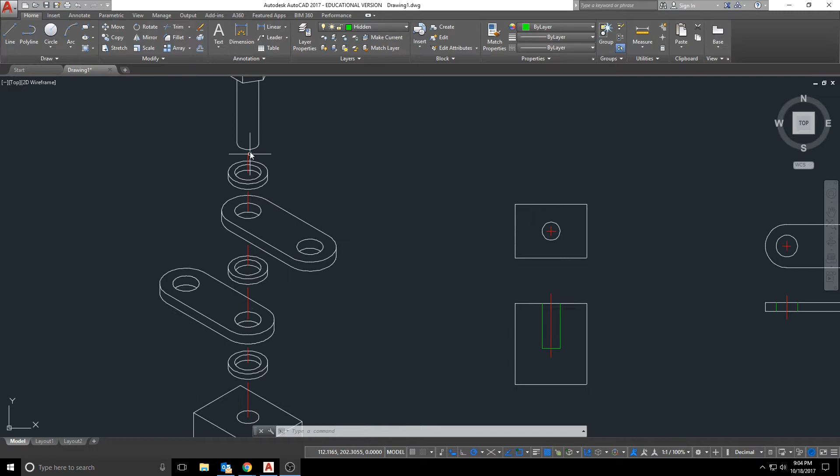So here you can see I've got the isometric views for all of these parts already completed and exploded. The only thing I did here is put in a trace line, which is just lines from the centers going all the way down to show that those parts connect, and I put those lines on the center line layer.

On this particular view, I put in the depth of the hole as a hidden line just to show that it does not go all the way through and that it actually does have a bottom. That hole is only 25 deep, so that's what I've got represented here.

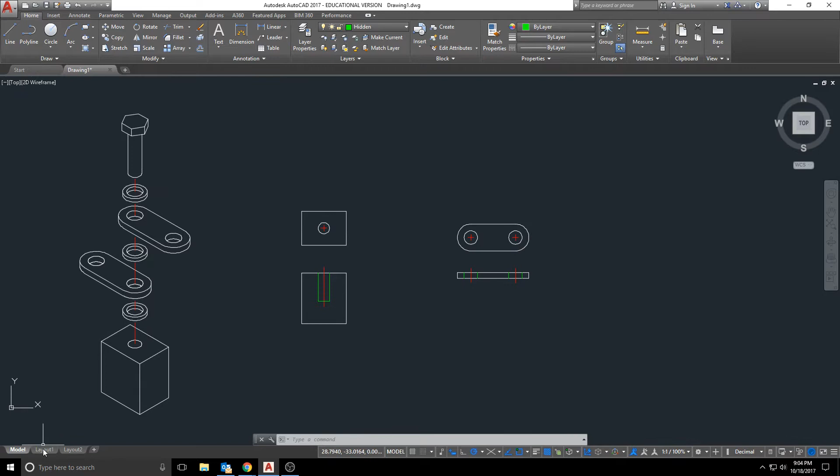So to begin with my working drawing, I'm going to switch over to my layout tab where my border exists, and I'm going to use the MV command like normal to create a viewport. But this time I'm not going to create a very big viewport because I've got to locate some different things inside the viewport. So I'm only going to draw it taking up about half of the screen.

And we can see that it brings in everything from the model space, and I don't want everything in this view. I only want my assembly view.

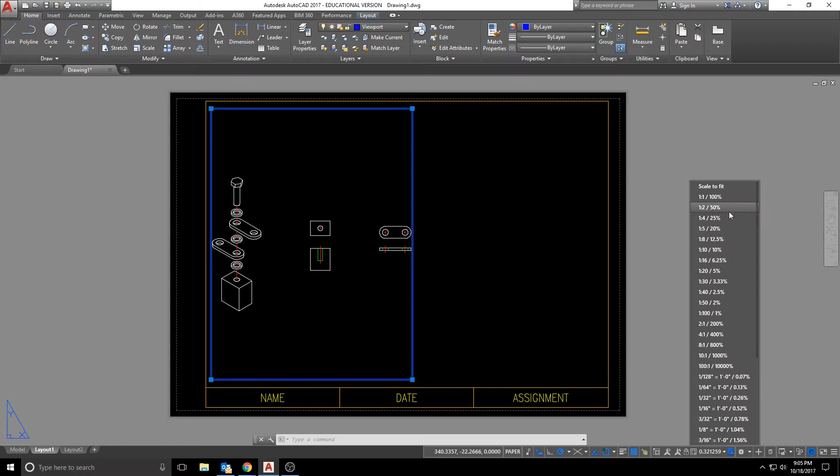So if I look down here when I click on the viewport, first let me change that to the viewport layer. When I look down here, it's at a scale of 0.32. I'm going to change that to a scale of 1 to 2, or 50%.

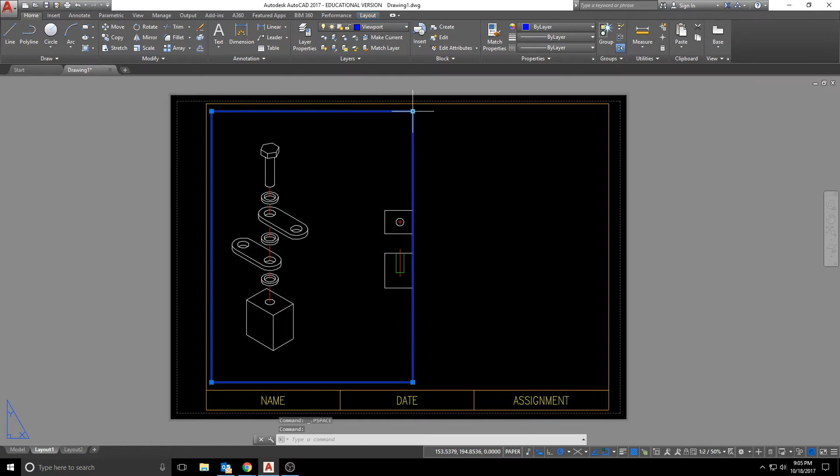And then once I'm in this viewport, I can double click inside of it to activate the model space, and I can pan this thing over so that it's in the view like I want it to be. Once I have this in the view like I want it to be, I can double click outside the viewport, and then I'm going to shrink it down so that it only contains this.

Now, because I have this set up at a certain scale and there's a lot of other stuff in here, I actually want to lock this particular viewport. So when I'm clicked on it, down here again I've got my scale and everything, but then I've got this icon right here, the lock icon.

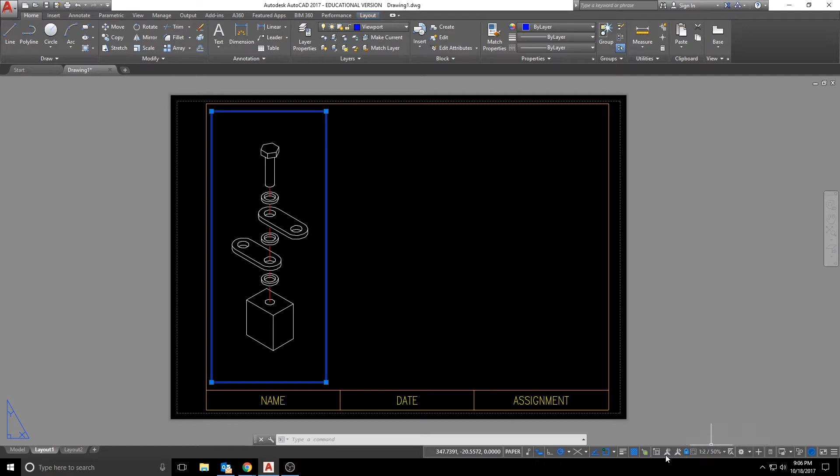And I absolutely want to click on that lock icon. That way, if I double click inside of here, I can't accidentally pan it or zoom it around anymore. So there's no chance that the information here is going to be moving in any way, shape, or form.

So at this point, I want to insert a table so that I can create my list of materials. So I'm going to click on the table button, and this is going to ask me what I want. So I'm going to use a standard style for the table and start from empty.

I want 4 columns because I want an item ID, a quantity, a name, and a material. And for the number of data rows, there's 4 different parts for this particular assembly, so I want a minimum of 4 data rows. I like to always have an extra row at the end or two, so I'm going to go ahead and say 6 rows.

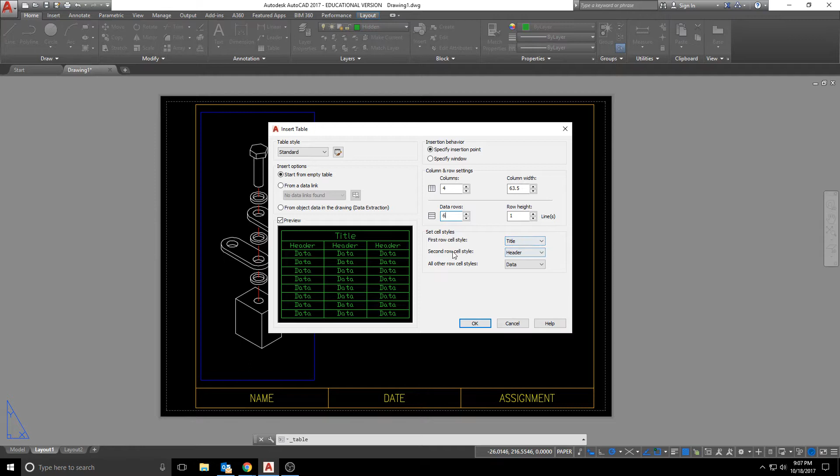For the first row, I want a title. For the second row, I want the headers. All other rows are going to be data. So I can go ahead and say okay to this.

Now, when I bring this in, you can see that it's quite large, and I don't need it to be that big, but I'm just going to locate it right up here with a left click, and now I can go ahead and fill in the information. So this first line, I'm just going to put list of material.

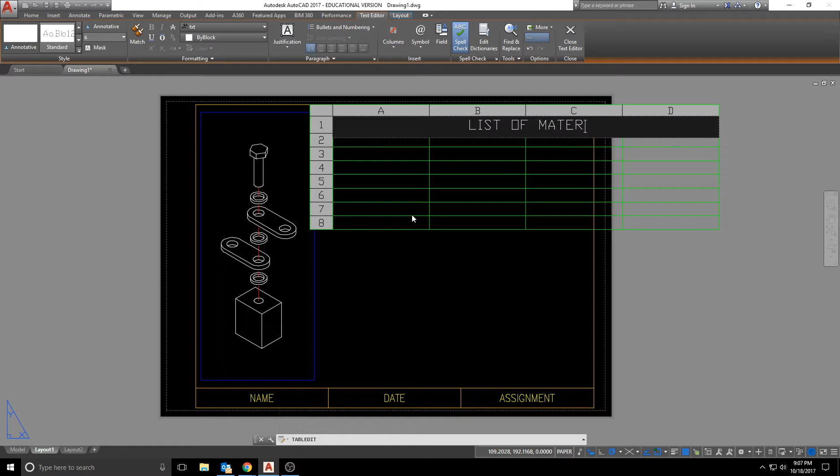We'll go with item, QTY for quantity, name, and MATL for material. Now, before I go any further, I want to shrink this down a little bit because this is kind of big. So we can shrink the item number down quite a bit because it's only going to be items 1 through 4. The quantity is going to be the same way. It's something that can be significantly shorter because it's only going to have a number in there.

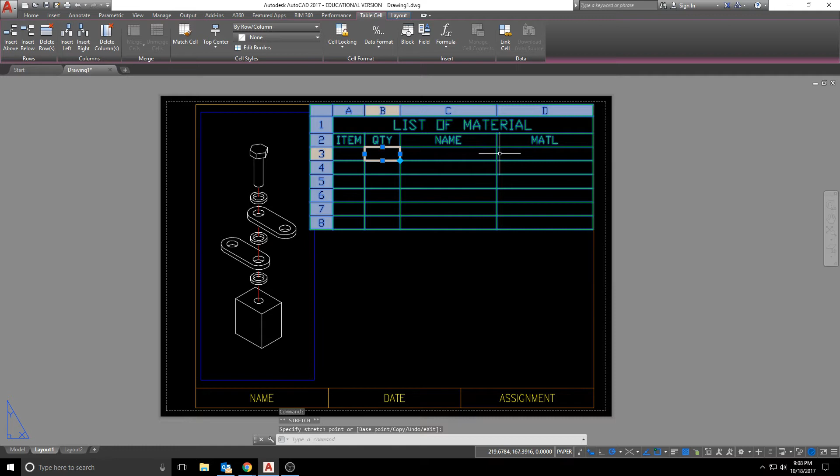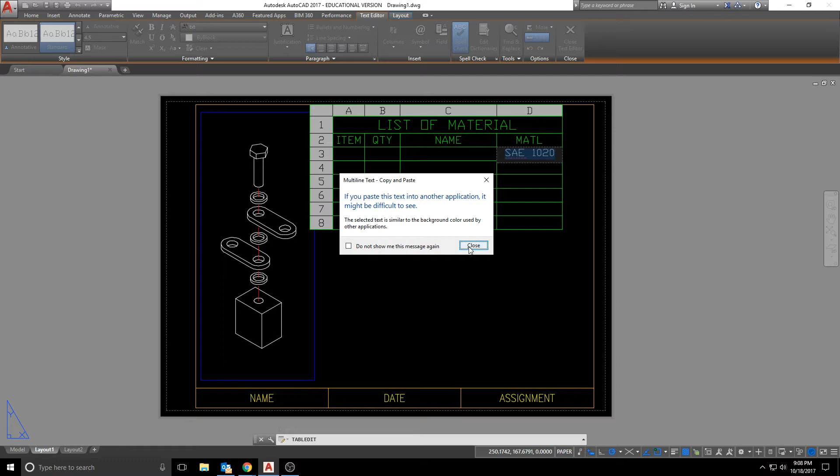And then the name, I can leave the name as is, or I can shrink it down a little bit, but I think I'm just going to shrink down the material a little bit because all of the materials for everything in here is going to be SAE 1020 steel. So with that in mind, I'm just going to come in here and put in SAE 1020. And then I'm actually going to copy that text using copy and paste. So I'm going to close that to say I don't need to see that error message. And then I am going to paste this into each of the rest of the cells because it's the same in each.

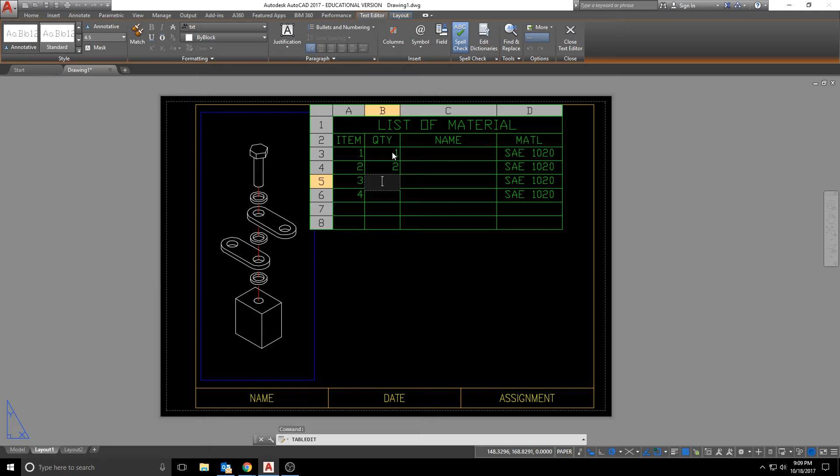So then I can come over here and type in the 1, the 2, the 3, and the 4. The quantity for item number 1, which I'm going to use as the threaded block, is going to be 1. The quantity for the link bar is going to be 2. The quantity for the threaded hex head screw is going to be 1. And the quantity for the washer is going to be 3. So now I can put in those objects. So we'll put in here threaded block. And we can see that that automatically adjusts itself to 2 lines, and that's okay for what we're doing in here. For part number 2, this was called the link bar.

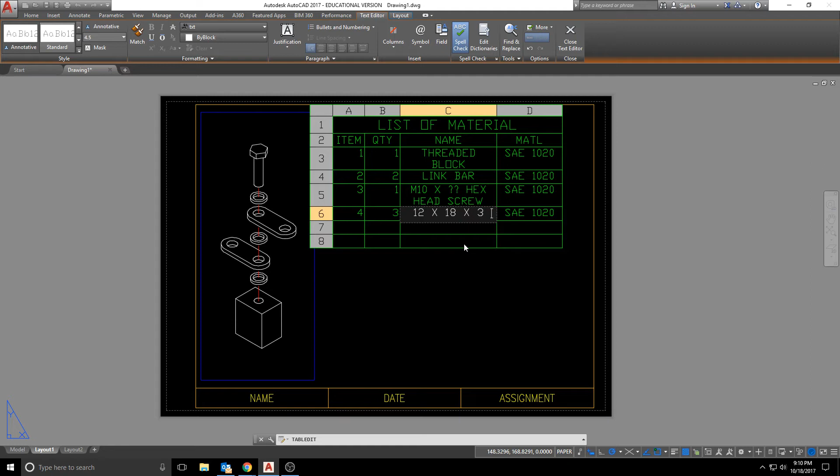Part number 3, this is going to be my M10 by however long hex head screw. Now the reason I put in the question marks is because part C tells you to calculate the length of the M10 hex head screw. So when you guys do the calculations for how long you think that hex head screw should be, you can put in that distance right here where I have those question marks. And then the last thing is going to be the 12 by 18 by 3 washers. So there we have our list of material, and here we have all of our parts.

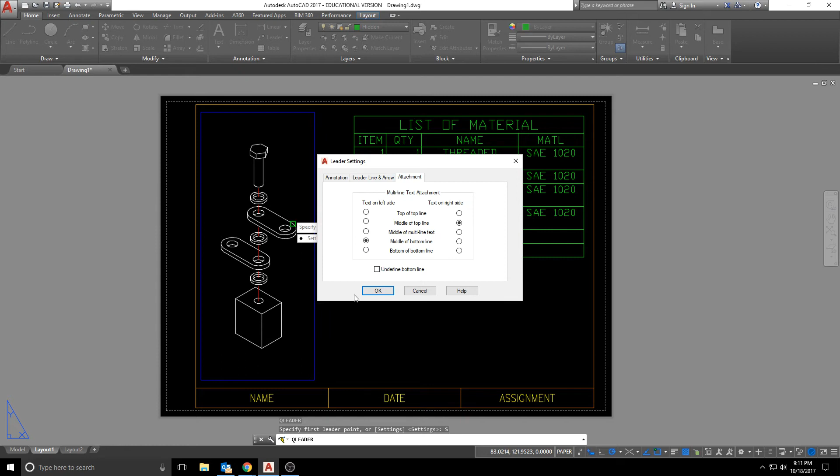Now, this list of material doesn't really do me any good unless I correlate it to this in some way. So let me move this over so that I have enough room to label everything over here. And I'm going to go to the LE command, which is the leader command that I've been using, and I want to go to the settings. So for my annotation type, I'm just going to go ahead and use the M text. Leader line and arrow, that's all going to be the same. Attachment is going to be the same, and then we can go ahead and label our parts.

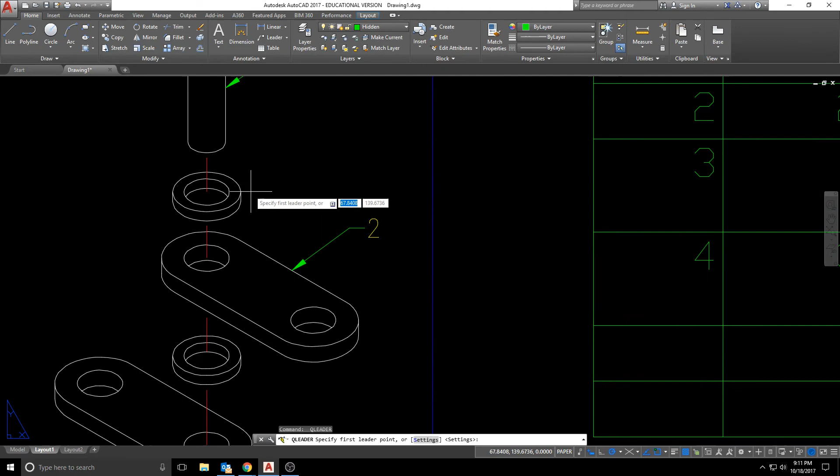So this one right here is going to be part 1. This right here will be part 2. This right here is going to be part 3. And then the washer will be part 4. Now, it's not important to label the washer in each location unless they're a different size. So if everything that you're dealing with is the same size, you can just go ahead and label it all in the same view. Now, with that being said, I don't have very much room left on this sheet, but because I only have 2 non-standard parts and they're both fairly simple, I should be able to get the rest of the information that I need from the drawing on this particular sheet.

So I'm going to go to MV, and I'm going to make my viewport. Double click inside the viewport, kind of zoom in on the part that I want. I'm going to go ahead and make this half scale as well. Double click back outside the viewport, and then we'll just shrink that down a little bit. And I do want to make sure that I lock this one as well. And then I'll move this viewport over just a little bit so that everything lines up.

Now, I do need to go in here and make some changes. This really should be on a different layer. This should not be on the hidden layer, so I'm going to go ahead and change that to the text layer. All of my dimensions shouldn't be on the hidden layer. These should be on the dimension layer, so I can change those to dimension. If you forget to do this stuff ahead of time, it's not a big deal to go back and change it to where it should be. Just remember to go back and change it to where it should be.

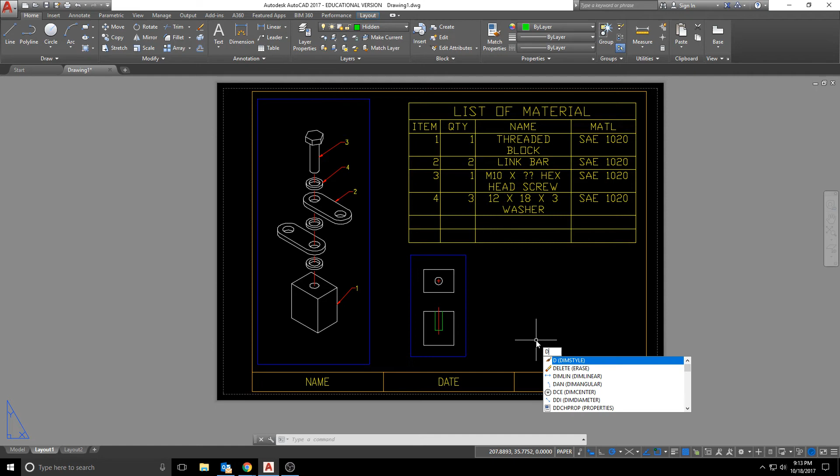So now that I've got this view in here, I can go ahead and do my dimensioning on here. So the overall width of this piece, let me go ahead and switch to my dimension layer so that I don't have to keep changing it. So we'll dimension this. I want to do the width, which is 40. I want to do the overall depth. I want to do the height of this hole, which is going to be the 15.

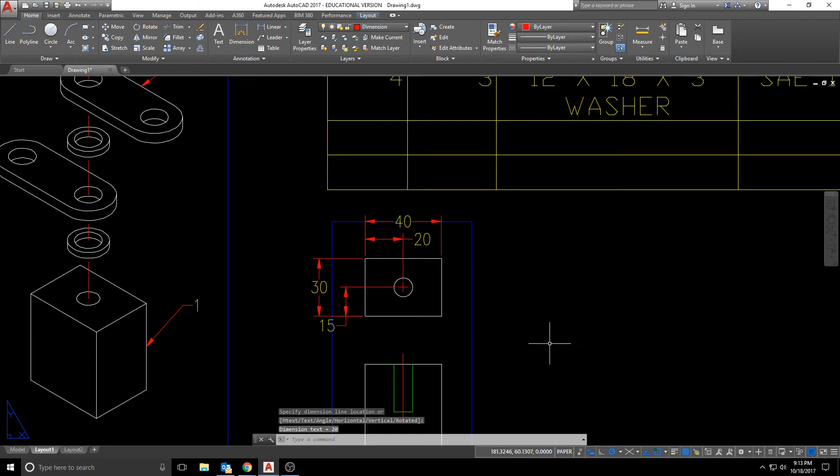And the distance of the hole in that direction, which is going to be 20. Now I can come down here and put in the overall height of the object, and then I can use the leader command to label the hole.

So we'll bring this down here, and we will call this M10 by 25 deep, which is how it's called out in the book. So with this information, I now have everything that I need to actually recreate this block, so I can move on to the next part that I have.

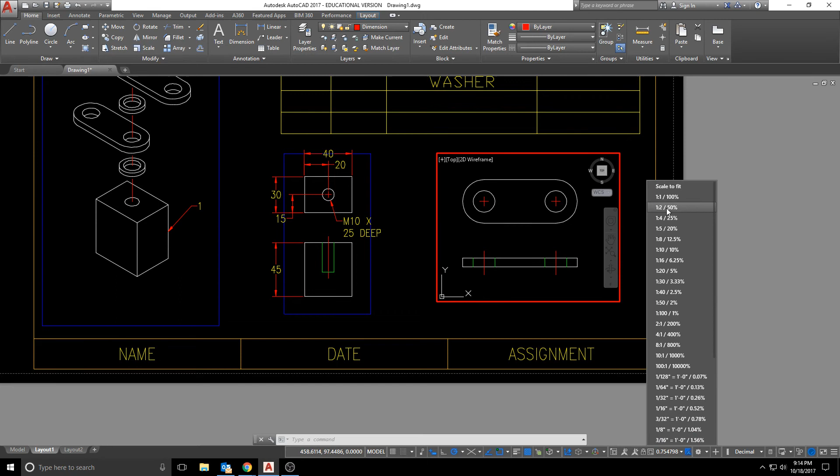So again, I'm going to go to MV and draw my corner, and in this case I'm going to double click in here and zoom in on that link bar, and we're going to change that to 1/2 inch scale as well. Double click outside the viewport and then just shrink the viewport down so that the whole object fits inside of here. And now I can move this to where it looks a little bit better and change this to the viewport layer. And then make sure that that viewport gets locked as well.

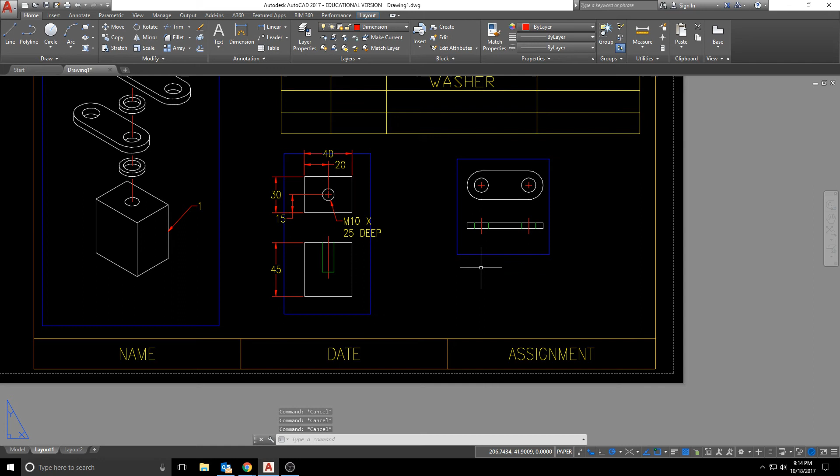At this point, I can go ahead and dimension everything that I have on here. So we will dimension from the center to the center here, which is going to be 40. I want to do a radial dimension on the outside of here, which is going to be the 12. That gives me the overall size of the actual link bar and all of the information that I need to actually draw that. And then for the 2 holes, I have a diameter 12 2 places,

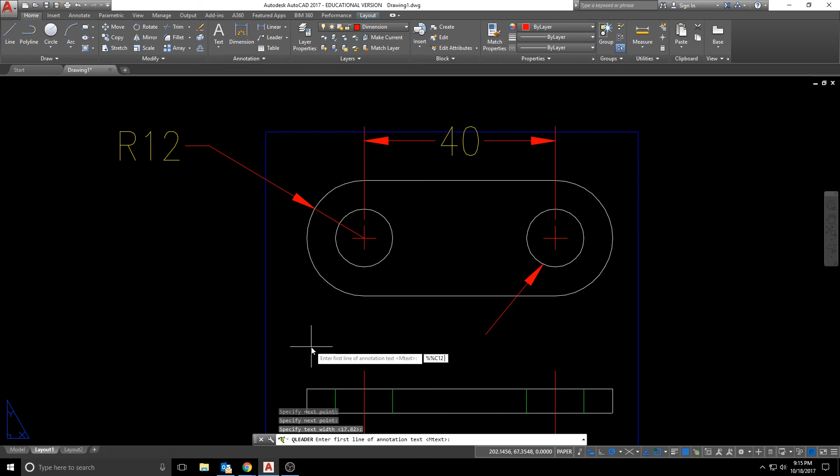so we'll go to my leader. We'll bring this off of here. And I will put in the %%C12 and then put 2 holes. So that gives me the diameter 12 2 holes, and I'm going to just drag this out so that it all fits on a single line.

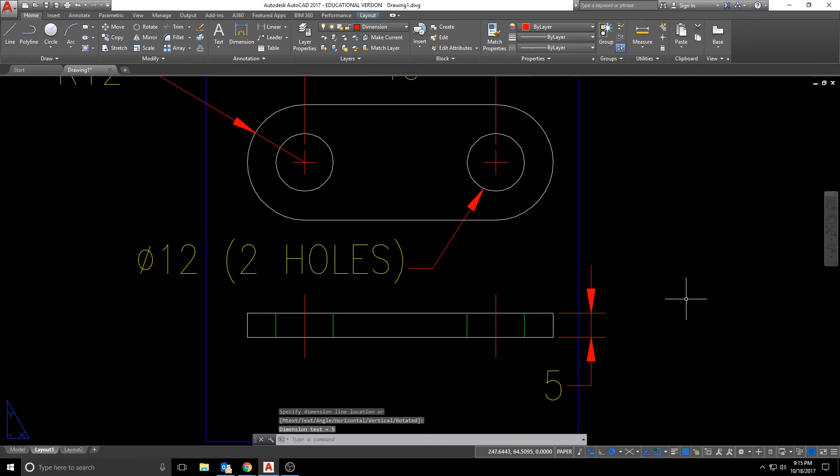And the last thing that I want to do is I want to add one more dimension in here to cover the overall thickness of this plate, which is going to be 5. So in this case, we can see here's my assembly view that's exploded. It's got the trace line that goes down through the center to let whoever's assembling it know that everything is lined up on the centers.

The hex head bolt and the washers are standard components. That's something that somebody can find a part number for. They can go to a website, they can order those pieces. The link bar and the threaded block are the 2 parts of this assembly that are non-standard. So those are the ones that I needed to include the detail views for.

If I was going to create a second sheet, meaning I was going to put these 2 views on a separate sheet or on a separate layout tab, I would want to do a little bit of work down here. And I just want to explain this at the end of this video so that everybody knows what's going on. Layout 2, I want to delete because it does not actually have my template on it. So layout 1, at this point, I would want to rename sheet 1.

And then to make sure that I have my template on any subsequent sheets, if I right click on sheet 1 and go to move or copy, create a copy and move to end and say OK, that gives me sheet 1 with parentheses 2. So I would just right click on that and go to rename and change that to sheet 2.

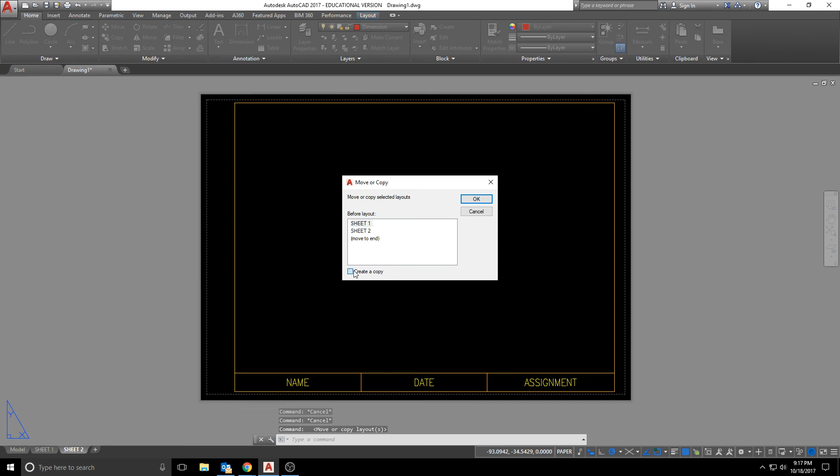Now what that would do once I get over here is that allows me to go ahead and remove everything that's here, and I still have my border, I still have all my layers, and I could go ahead and put in any views that I have on this sheet. If I needed another sheet, I could right click down here again, move or copy, create a copy, move to end, hit OK. And then I could rename this to sheet 3.

So no matter how many sheets you have in your drawing, you can just continue to add the sheets down here using that move or copy. That way it's always taking your border with you, and you don't have to copy and paste it to a different view or do anything else like that.

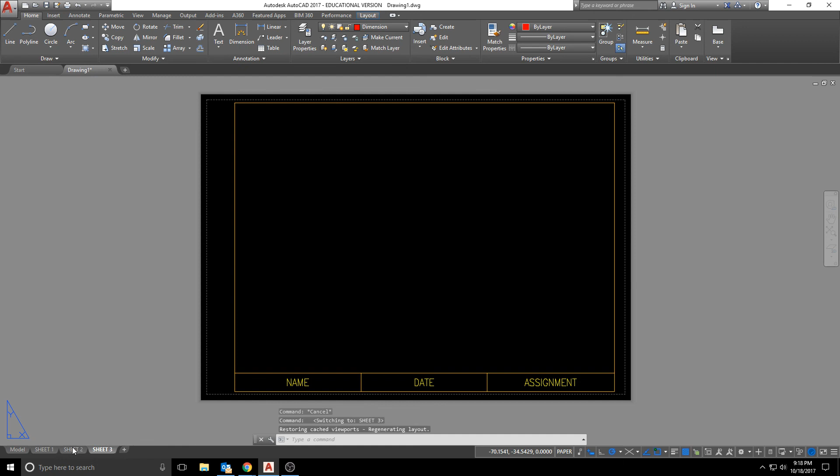So once you already have your name, the date, and the assignment in place, moving or copying means that it's just going to be in the same place in all instances, and then you can just flip back and forth amongst your sheets by clicking on the tabs down here at the bottom of the screen. But that's going to wrap up exercise 12-1. And again, this is one aspect of a working drawing where you have an assembly view, a list of material, and then all of the detail views that make up that particular assembly.